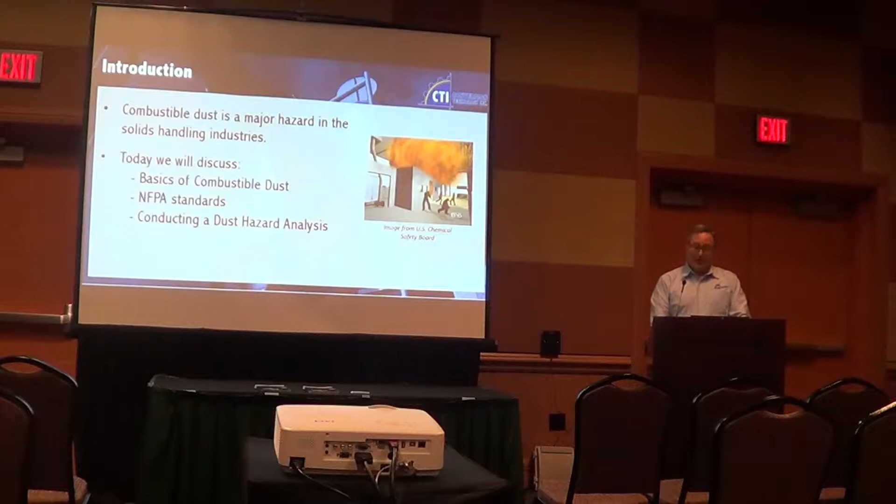So what do we mean when we talk about combustible dust? NFPA says that combustible dust is a particulate solid that presents a fire hazard when suspended in air, regardless of size or shape. In layman's terms, if it can burn and hangs in the air, if you can grab a clump of material, throw it in the air, and it'll waft around and form a cloud, and that's something that can burn, then that's a combustible dust.

Typically these would be dry foods, plastics, wood, rubber, textiles, basically most organic materials, but then also some non-organic materials like metals, if it's a fine enough powder. Basically anything that can oxidize, so if you get aluminum powder, it can oxidize and it can burn.

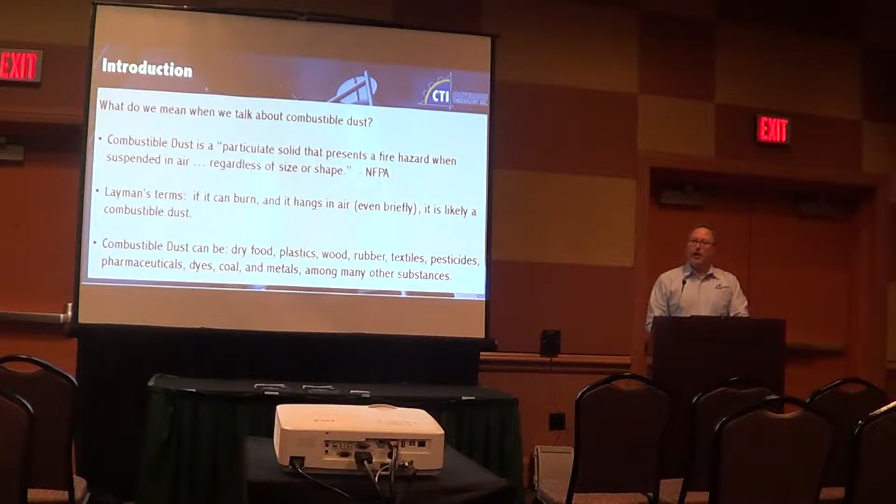With combustible dust, it's important to know that a decrease in particle size increases the rate of combustion. My example here: think about if you have an entire log, a whole tree. If you set that on fire, it would burn for hours and hours. But if you chop that up into smaller pieces, it burns a lot faster. And finally, if you get something like sawdust, it can burn very fast, especially if you mix it with air.

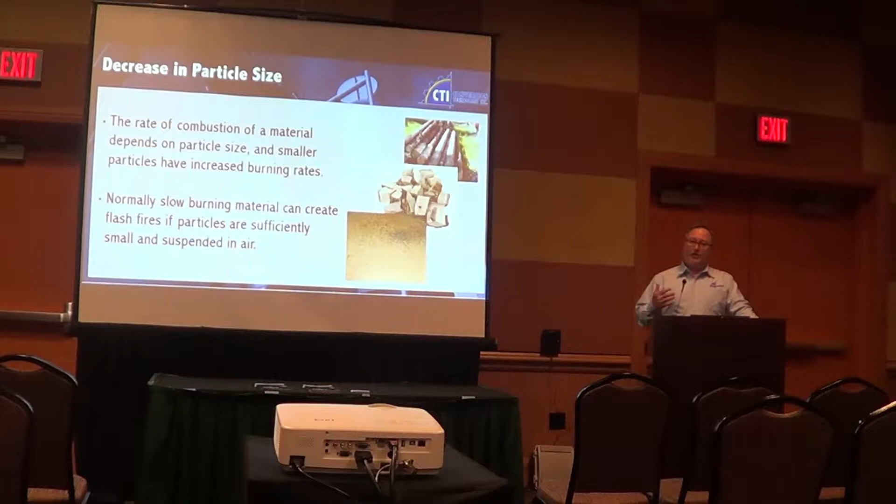And the reason for that goes back to the fire triangle. You have three components: fuel, oxygen, and ignition source or heat. That oxygen is a critical component of why things burn slower when they're larger, because that fuel in the log, most of it is inside the log. It's not touching oxygen, so you have to burn from the outside in, burning away the outer layers before the inner layers are touching oxygen.

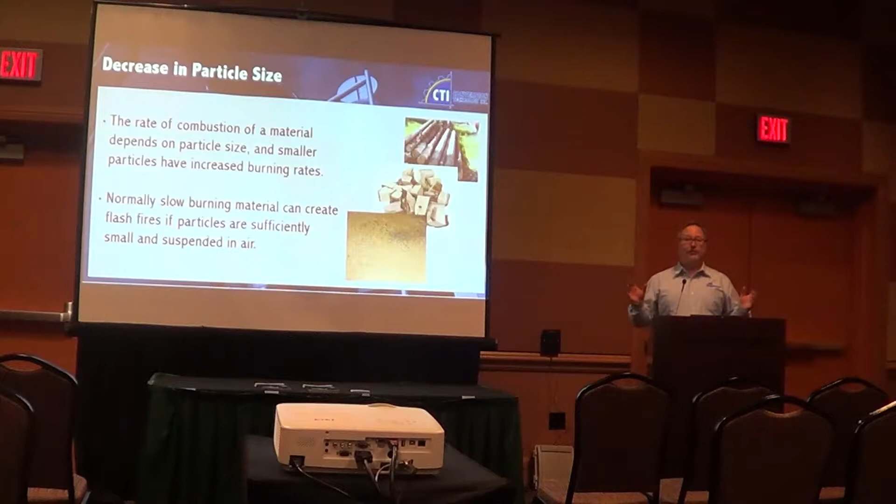But if you have sawdust and you disperse that in a dust cloud, all of the fuel is ready to burn right now, and it will burn right now. It'll be a flash fire, and it will just go.

So what are we talking about when we normally talk about combustible dust? What size are we talking about? Historically, we talk about something that's 420 microns, which is normally a US number 40 sieve. But really what you want to consider is if a particle can be suspended into the air, it doesn't matter if it's 420 microns or not. That particle isn't conscious -- it doesn't know, 'oh, I'm greater than 420 microns, I'm not combustible dust.'

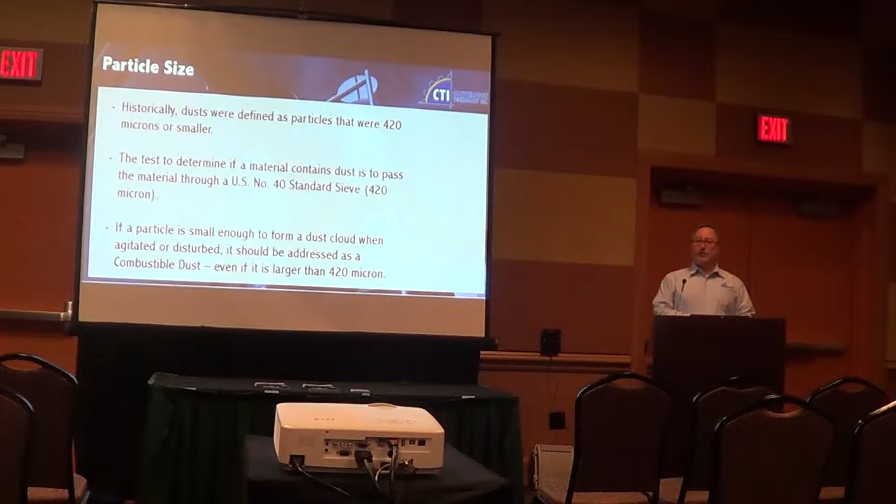There's actually been tests of sawdust and salt materials where you can have over a millimeter average particle size and it still acts like combustible dust. But this is what it typically looks like -- something like coarse table salt or granulated sugar is normally about the size of particles you're worried about as far as combustible dust. But again, the easiest way is to just grab the material, throw it in the air, and then you'll know maybe it's combustible dust.

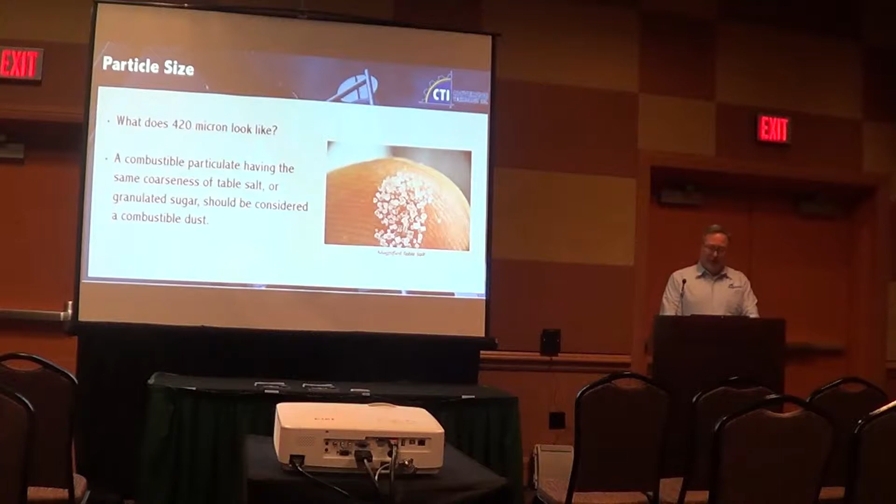So as we talk about the hazards of combustible dust, there are a few definitions I want to get out, because I'm going to talk about fires, deflagrations, and explosions. I just want to make sure we're all on the same page. So fire is the rapid oxidation of a material, and it's a chemical process.

That's one thing to remember: we think about fire as something we cook food with or warm ourselves with, but really fire in and of itself is just a chemical reaction.

So what happens is you have oxygen mixing with something that can oxidize, and it starts as a runaway reaction that goes so fast that it just produces a lot of heat.

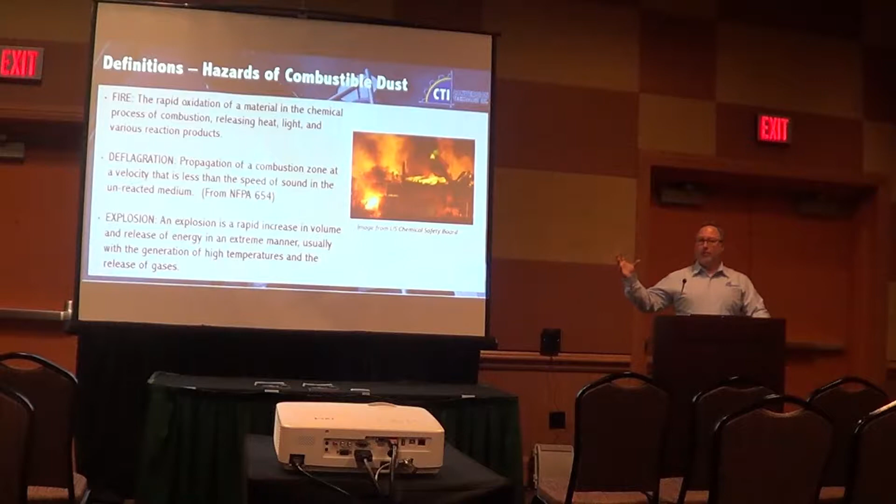A deflagration is where you have a flame front that propagates through a combustion zone. Basically part of a material or part of the dust cloud ignites, and that fire that starts on one side produces the heat that burns the rest of the material. But just think about it, it's just a flash fire, so it moves through material.

So a deflagration is different than something else you might know of as a detonation. The difference is in a detonation, the flame front or the pressure wave moves faster than the speed of sound. A deflagration is going to be less than that. So it's not like gunpowder, it's not like munitions, but it still is a rapid flash fire.

So an explosion in our context is basically going to be the increase of volume of an enclosure, and then the catastrophic failure that releases a lot of pent-up energy, releasing shrapnel, things like that. So when we talk about explosion, we're not talking about an explosion like a bomb, which has that supersonic blast wave going out. What we're talking about is a vessel or structure or building that has an increase in pressure inside because of the deflagration, and then the vessel itself ruptures and causes the explosion.

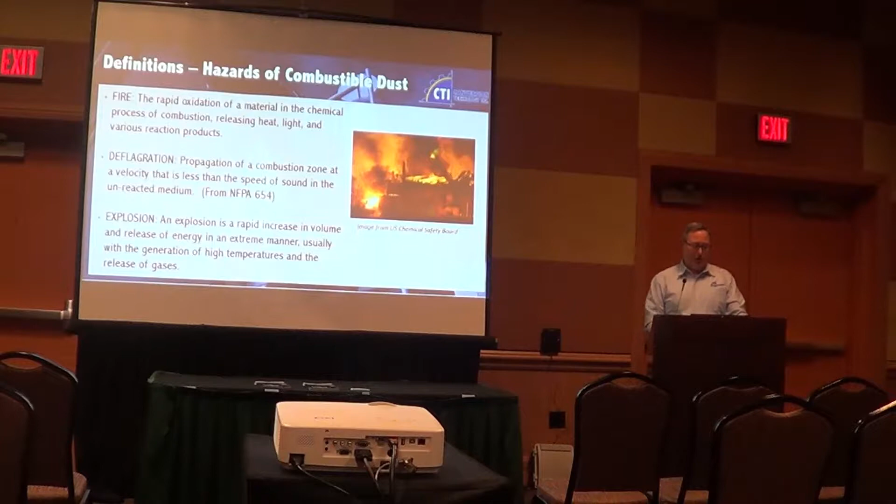So again, I mentioned the fire triangle. You have those three components: the oxygen, the heat, and the fuel. When we get to deflagrations, you just add one component to the fire triangle, so sometimes you'll hear it called the deflagration square. Basically you have the three things you need for a fire: the fuel, the oxygen, and the energy, the heat source. Then the fourth component you need is that fuel suspended in the air.

Oftentimes people say, oh, I'll take a blowtorch to my material and it doesn't burn, it just smolders, it doesn't do anything if they put it on a pile. The reason is some materials, if you normally try to burn them, might not burn that easily, because they really need a lot of oxygen. So if it's just sitting there on a pile, on the floor of your factory, or on a ledge somewhere, it might not burn that easily.

But if you get it suspended in the dust cloud, you get that fourth component, that suspension in the air, then you can have a deflagration of something that maybe normally doesn't burn too easily. But if you get it really mixed up with oxygen, a really rich environment where it's just ready, then it can burn.

Typically, having all four of those conditions in an industrial plant is sort of rare. If you were to walk into a room and it was at a thick enough concentration that you had a dust deflagration, you wouldn't want to be in the room. I mean, you probably would not be able to see across the room.

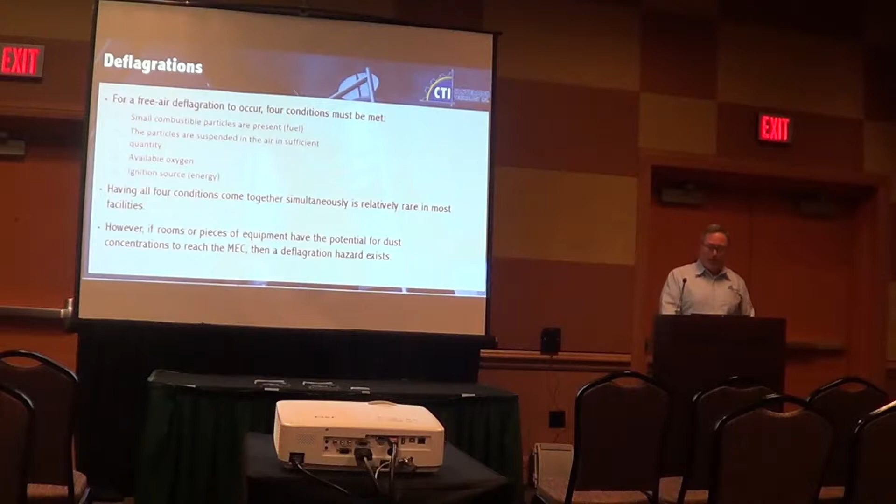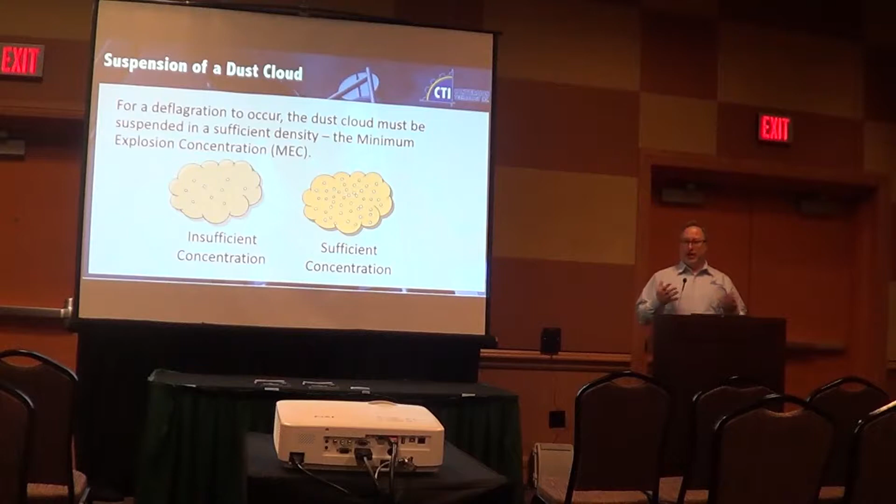The main reason is it has to be a sufficient concentration. Unlike industrial hygiene, where just a particle here or there breathed into your lungs can hurt you, with combustible dust those particles have to be close enough together that when one catches fire with just a little flame, it's close enough to ignite the next particle, and that one ignites the next. It has to be a thick enough cloud for that flame to propagate through, because the flame from one individual speck of dust isn't that big. You need a lot of specks of dust to get that flash fire.

One way to think about it: with coal dust, if it were at the minimum explosible concentration, you wouldn't be able to see a 25-watt light bulb 2 meters away, about 6 feet away. It would be that thick that you couldn't see that far. Hopefully most people don't work in environments like that.

When deflagrations occur, they release energy in the form of heat very rapidly. A fire generates a lot of heat, and that heat does two things. First, it heats up the air, and like a hot air balloon, when you heat up the air it expands. Second, that solid material, the dust, when you burn it, turns into gas, and gas is about 8 times the volume of the solid material.

If you have a little speck of sawdust and you burn it, the gas takes up 8 times more space. So you get a rapid increase in air temperature in that area, and the space that material takes up increases very rapidly and expands. You'll get a pressure wave that goes through, as that air and those gases expand, creating a pressure wave.

That pressure wave comes in front of the fire, and it will actually lift up dust that's sitting on surfaces. So if you don't have a good housekeeping program and you get a localized flash fire, that pressure wave moves forward, basically shoveling up the dust on the ground. Then that dust that gets shoveled up catches fire, and that's when you'll have these catastrophic events where the fire just rips through a building.

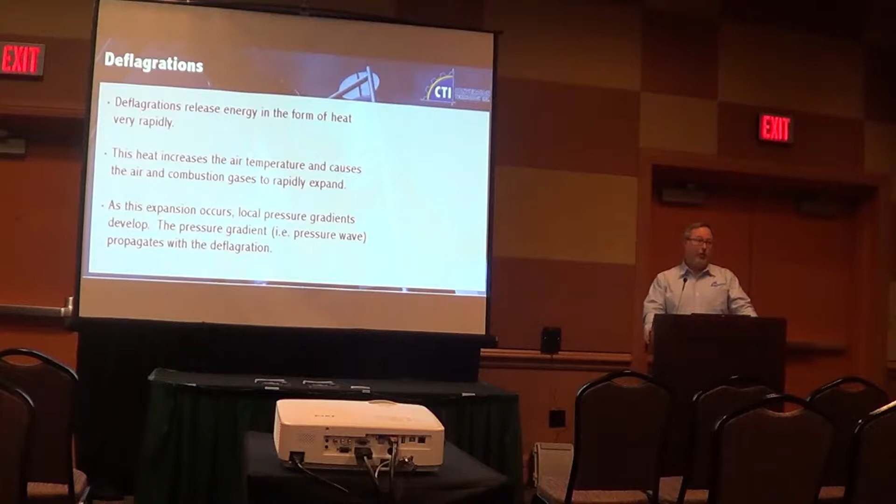Eventually that pressure wave expands to encompass the whole building or vessel where it occurs, and the building or vessel might not be able to contain that pressure. That's when you'll have dust explosions.

So the dust explosion hazard - if you want to look at your facility and ask where the hazards are, this is what you want to consider: if you have the potential for a dust cloud and ignition, and there's oxygen, and if that's enclosed by a building, a room, or some type of container, then you have the potential for an explosion, because the pressure generated from the deflagration doesn't have anywhere to go. It starts building on the walls of the vessel, on the walls of the building, and eventually the strength of that vessel or building won't be able to hold that pressure in.

You can get very large pressure buildup during a deflagration. When that structure ruptures, that's when you have an explosion - a catastrophic release of the pressure built up inside the vessel.

Most dust explosions originate inside pieces of equipment, as mentioned before, so you'll often have it start inside equipment or a container. In industrial operations, the most common places are dust collectors, which account for 50% of combustible dust incidents. Most of those are fires, because with a dust collector you're pulling the fuel into a filter, and except for when it's doing a filter pulse, the fuel is not actually suspended in the air - most of the time it's stuck on the filter.

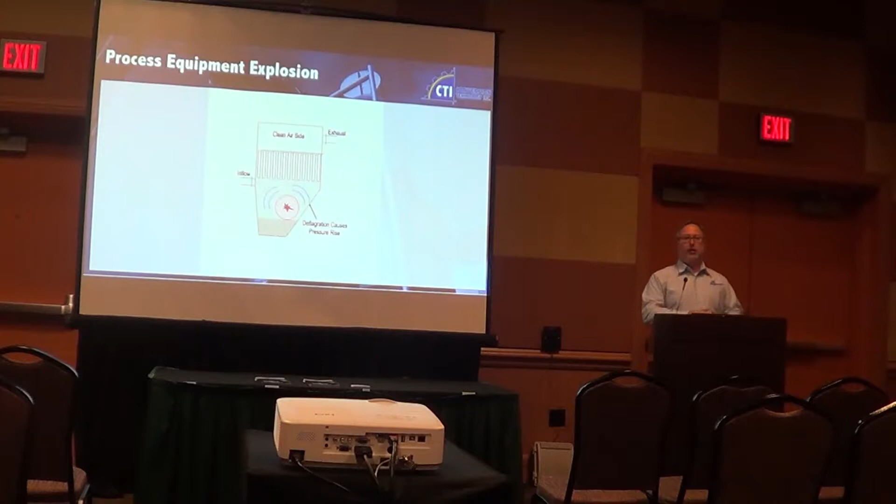Another way, I'll just briefly go into it, is explosion suppression. These systems have a detector that senses the pressure wave going into the vessel, and a cannon that within 5 to 20 milliseconds detects the pressure wave and releases to extinguish it. It floods the vessel with sodium bicarbonate, which stops that chemical reaction, stopping the flame and fire before it builds up so much pressure that it ruptures. But I could go into explosion protection techniques for hours, and we don't have that much time today.

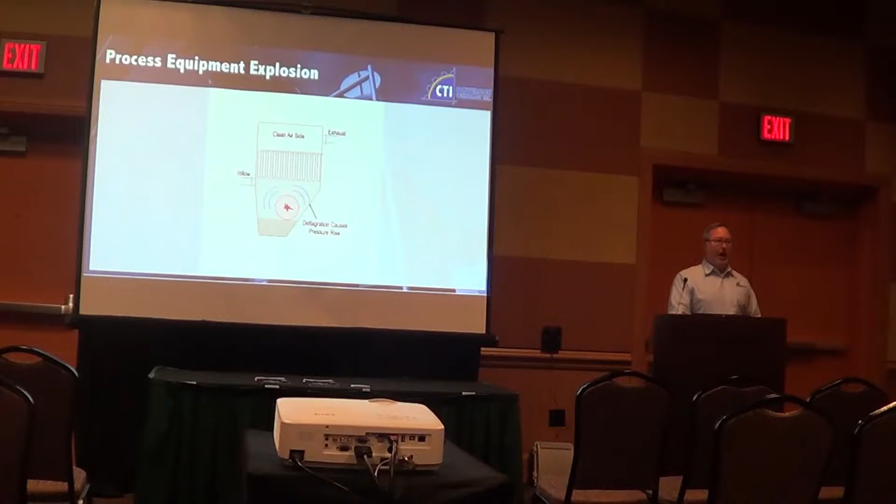In an industrial setting, dust explosions can create a chain reaction, resulting in more explosions and flash fires. Flame fronts can travel through ductwork from one piece of equipment to another. Inside the building, the pressure waves from the initial explosion can disturb settled dust in the air, creating a dust cloud that permeates throughout the whole building.

With past explosions or catastrophic accidents at facilities, the narrative is often that you hear something like fireworks going off, a pop, pop, pop. That's the flame front going through connected pieces of equipment, blowing up other places. It travels through ductwork, hits another vessel, another dust cloud explodes. And when it gets outside the equipment, if it creates a dust cloud in the room, that's when you can have an extremely bad secondary explosion, which we'll talk about in a second.

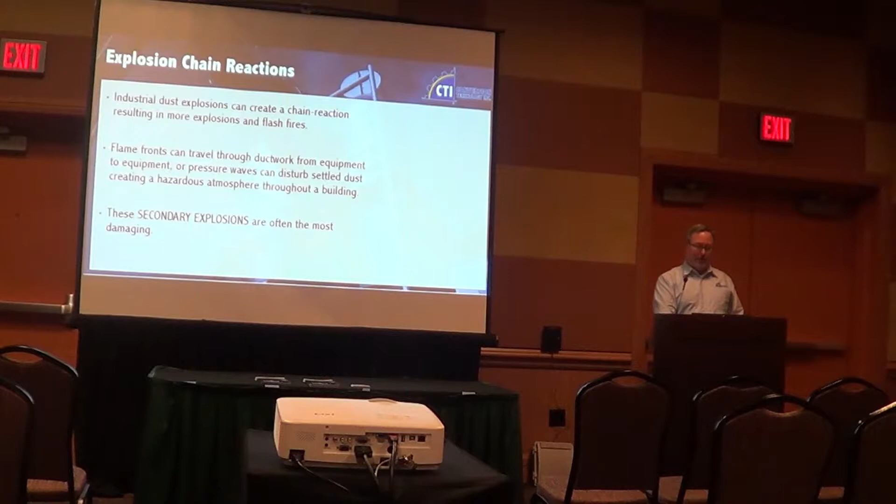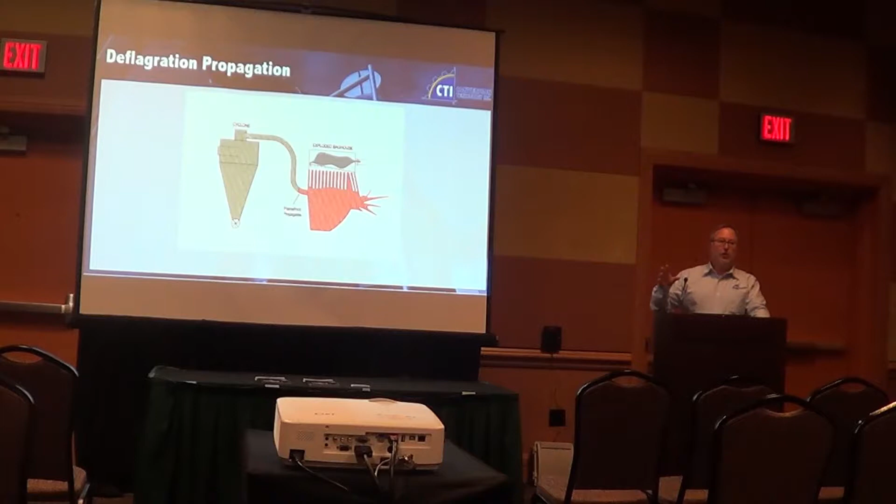So in the scenario where you have the baghouse explode, that flame front can travel against the flow of air. The air is flowing from the cyclone to the baghouse, but the flame front can travel faster than your conveying air, going back and causing another explosion in connected pieces of equipment.

A lot of times what we'll have here is isolation in the ductwork, some type of sensor. If you have a blast panel in the baghouse, it will have a detector that senses there was an explosion in the baghouse, and a fast-acting valve, or some active system, will shut off that connection in the ductwork. Or you might have a backblast damper, a passive system with a flapper. As I said before, the pressure wave goes in front of the flame, so it comes before the flame and slams the valve shut. Then when the flame comes, it hits the valve and doesn't travel back to other pieces of equipment.

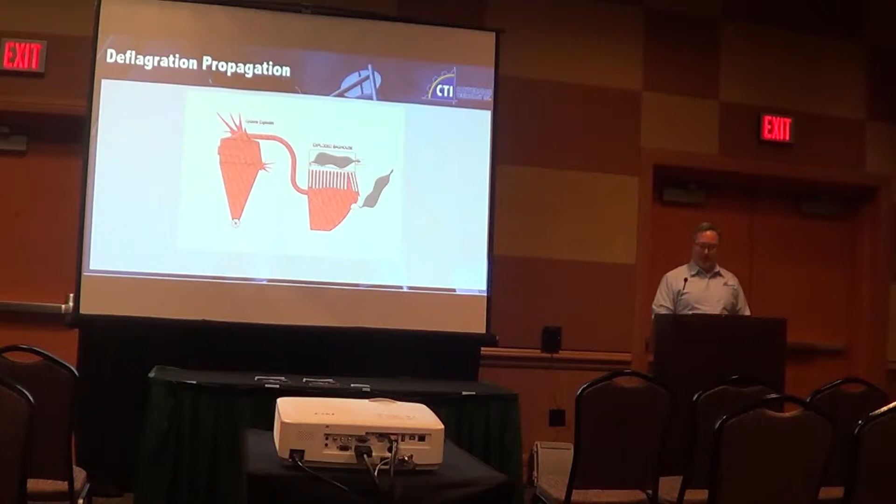But by far, the greatest hazard of combustible dust comes from secondary explosions. This is an image that OSHA had in their National Emphasis Program to illustrate what that is: a primary explosion occurs in a vessel inside a building.

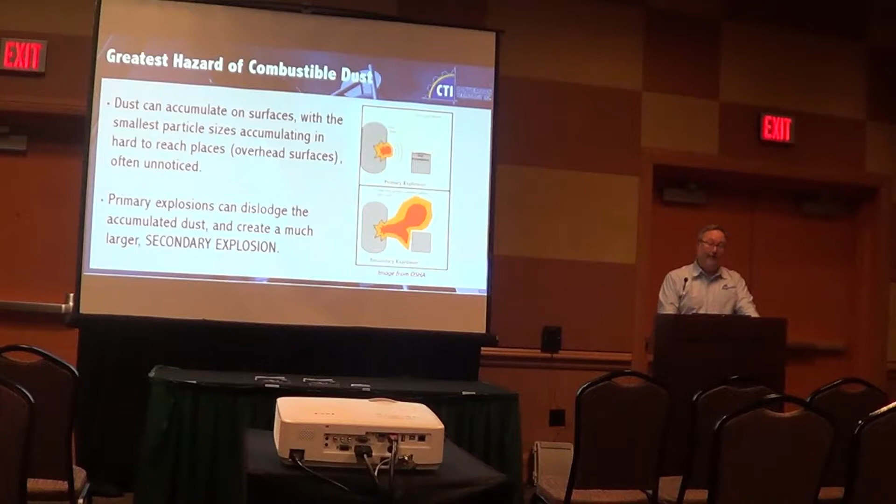If you have dust accumulation on surfaces, even overhead surfaces, you might do a great job of housekeeping on the floor or levels you can reach, but unbeknownst to you the rafters or purlins 20 feet up are covered in dust. If a primary explosion creates a shock or pressure wave through the facility, it can knock the dust off surfaces, lift it off the ground, and clean off control rooms that haven't been cleaned in 5 years. That dust swept off the surfaces becomes a larger dust cloud in your building, and then a flame or other ignition source can cause a secondary explosion.

And this is where you have really catastrophic accidents. This event is what got OSHA started when they reissued the National Emphasis Program 11 years ago—the Imperial Sugar incident near Savannah, Georgia, and Port Wentworth.

14 people were killed, 36 were injured. It was such a massive event that it took the U.S. Chemical Safety Board and OSHA 19 months to investigate it.

They ultimately determined it was inadequate design — they enclosed a conveyor that didn't provide any way of extracting the dust, which allowed a dust cloud to form inside the conveyor. It was also poorly maintained; the bearings weren't maintained, and that created an ignition source.

And the reason it was so devastating is poor housekeeping. There were snowdrifts, apparently, of sugar in that facility, and when this happened inside the piece of equipment, it got outside and started hitting those accumulated piles of sugar — this is what happened.

A more recent incident happened a couple of years ago at a Didion facility in Cambria, Wisconsin — a flour mill or corn mill. There were 19 employees on site; 5 of them were killed and the other 14 were injured. So 100% of the people on site were severely impacted by this event.

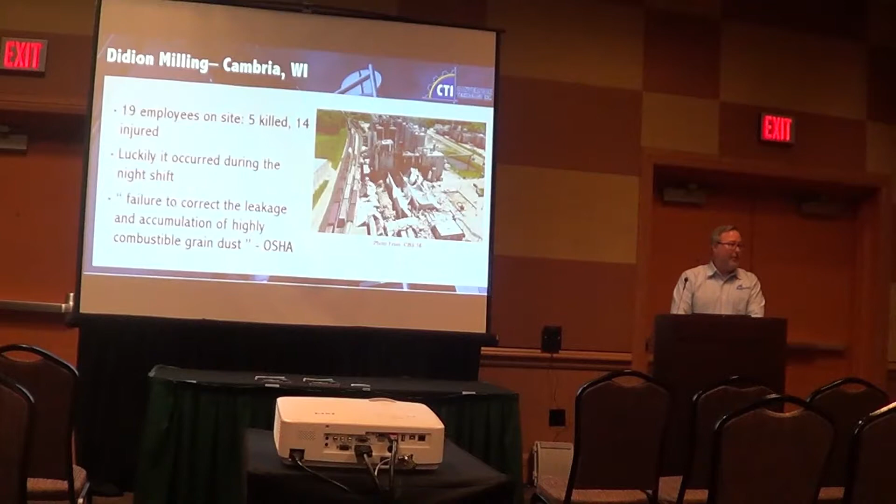All right, so we'll talk a little bit about NFPA standards and how you can use those to help ensure the safety of your facility. There are several standards that exist to prevent dust fires and explosions. Currently there are several, but ultimately it might go to a single standard, which I'll mention soon.

The National Fire Protection Association has staff, but it's also a volunteer organization. Members like myself and others have our normal employers, and we volunteer and sit on committees. It's a diverse group — people from industries, consultants, equipment manufacturers, firemen and fire marshals, and insurance representatives. It's a group of people familiar with industry from different angles who come together to write these standards.

Several of the standards were recently updated. NFPA 652, the fundamentals of combustible dust, was updated to the 2019 edition. But with NFPA standards, they're kind of like cars — the 2019 edition came out in 2018, and the 2020 editions are going to come out in 2019. So most of the other standards are coming out this year, even though they'll be the 2020 editions.

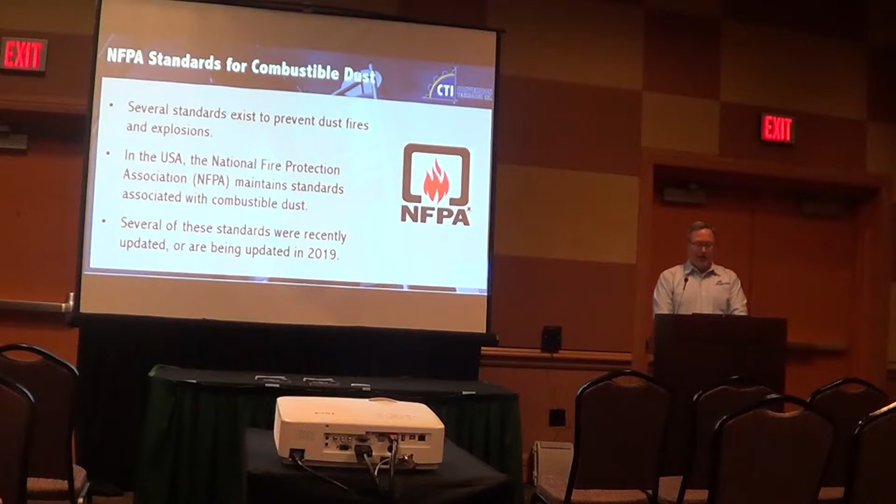NFPA is charged with creating fire standards for fire prevention and fire protection. NFPA doesn't have any enforcement power of its own, so you don't have to worry about the NFPA police banging on your door. It's a volunteer organization, but since they don't have enforcement power of their own, they rely on authorities having jurisdiction to enforce their standards.

Authorities having jurisdiction are typically your local fire marshal or the people who issue building permits. So if you need a building permit or a business license, they might say, okay, if you're going to have a building or business here, you have to design that structure to be in compliance with NFPA standards. That's typically who authorities having jurisdiction are.

But it can also be your insurance provider. They say, hey, we're assuming the risk of your operation, so we're going to insure you only if you design your building in accordance with these fire protection standards — because if you don't design according to NFPA, then it's too risky for us to insure you.

But then also OSHA relies on NFPA standards as a way to show that this is a recognized hazard. For example, in woodworking, NFPA standards have been around since the 1920s — almost 100 years of documents stating that sawdust is a fire hazard. If you don't deal with it, you're ignoring a recognized hazard.

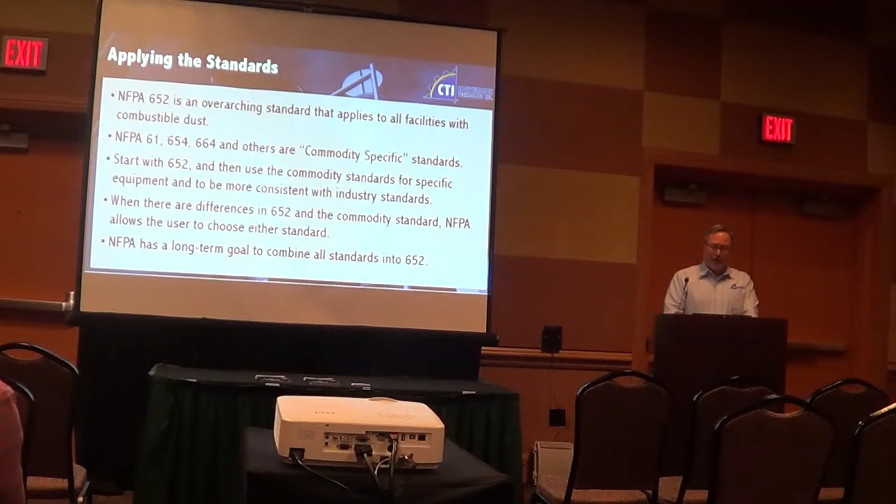So what are the major requirements of NFPA? What does it make you do, or what does it say you should do?

First, it talks about how you lay out and design a facility where you're going to have combustible dust. It talks about separating dust hazards from other hazards.

One of the things about the Didion flour mill, that mill was the whole area where there was nothing left. In that picture, there was just basically a white concrete pad. That was their warehouse area. So there was dust that was going from the processing into their warehouse, and that's why it just completely leveled that, because they weren't properly separating where you're generating combustible dust from places where you normally wouldn't have combustible dust.

So dust is going to waft through the air. It's going to deposit in places. So NFPA talks about how do you separate those areas in your building.

All the standards require you to learn about the properties of the material. How easy is it to ignite the dust in your process? Is this dust non-combustible, and this dust is combustible?

If you have a cement plant, you might have some starch, and you might have some rock, other material. Well, the rock dust probably isn't combustible, but the starch might be combustible. So you need to know which materials are combustible, which aren't.

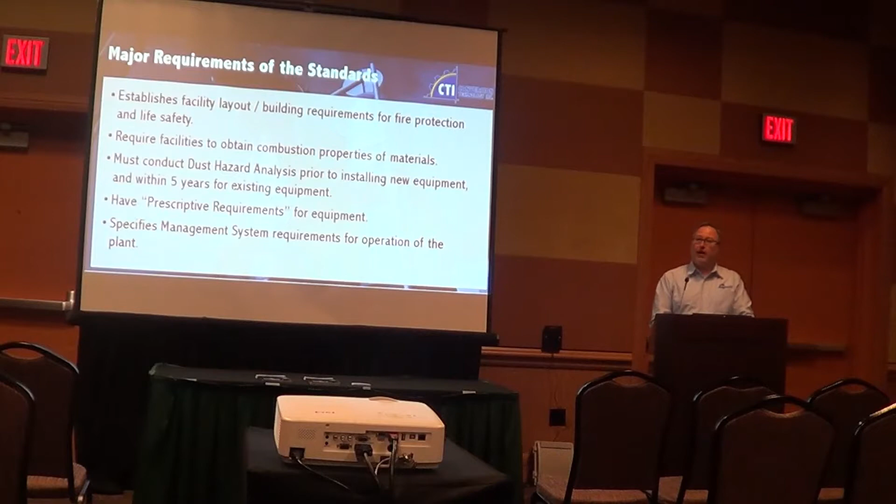There were several explosions just in a few-month period. And WorkSafe British Columbia, which is their equivalent of OSHA, put a moratorium on sawmilling of dry, beetle-killed lumber until they could address the hazard, figure out how can they do this safely.

So these management systems are talked about in NFPA, this management of change, the hazard evaluation. All this is talked about, how you have to have that system in place. It talks about housekeeping protocols, employee training. All this stuff is addressed in NFPA.

Yes, those management systems are in 652.

It talks about management of change, and those requirements are slowly rolling out to the other standards. There was an MOC requirement in NFPA 61, and the next version is going to be more stringent.

They were kind of lax before. The NFPA 61 committee is interesting—the different committees have different personalities, and some people take hazards a little more seriously while others think, no, just keep going. But they're starting to really come together and coalesce on what the requirements are.

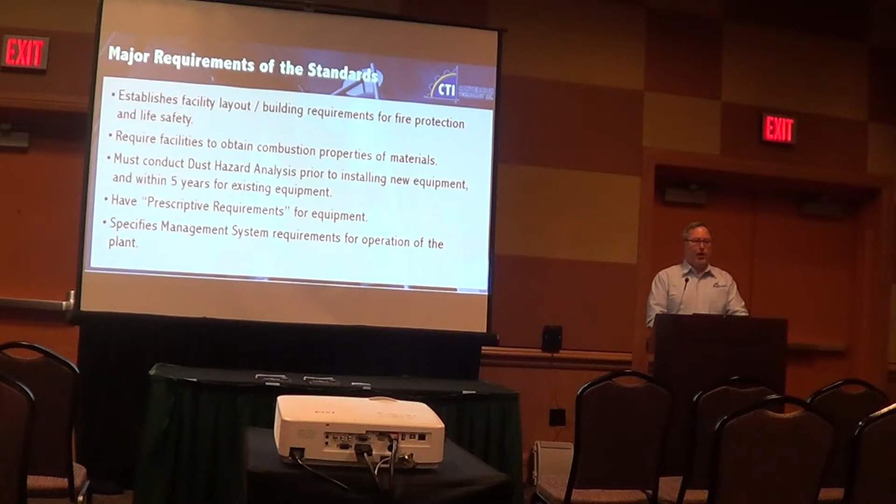So there have been some recent changes. If you're someone who's pretty knowledgeable about NFPA standards, with NFPA 652 there previously was a deadline to complete dust hazard analysis for existing processes—3 years after the date of initial issuance of NFPA 652. That would have been September of last year.

So last year they issued an extension. All the other standards gave people 5 years, so they just went around that. Now the deadline to complete a dust hazard analysis, or DHA, for existing processes is September of next year.

They've also added a requirement that you can't just do an initial DHA and walk away—you have to revalidate it every 5 years. It's basically like the PSM requirement: if you do a process hazard analysis, you've got to revalidate it, come back and review it, because there will be changes in the standards and minor changes in your equipment, and just continual improvement.

We're always learning, so you want to come back, because some of the assumptions you made in your dust hazard analysis might not be valid. You might say, oh, we'll never have a fire here. Well, 5 years later you come back and realize you actually had a fire every 6 months, so maybe your assumptions are wrong.

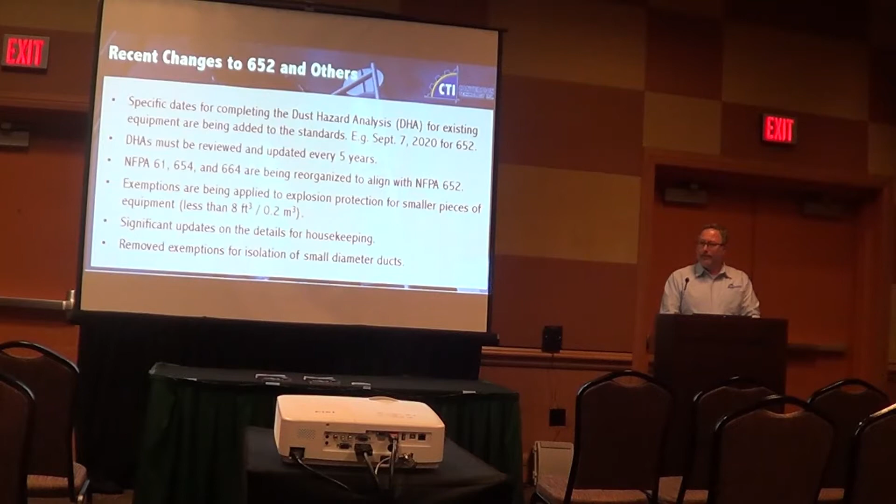Yes? These details on housekeeping—are they currently available or shortly forthcoming? If you get the current version of NFPA 652, yeah, they're going to be in there.

And if you get the standard, there's a little marker next to the code—it'll have a little N. So for example chapter 8.3.4, if it has an N next to it, that means it's new. You can go to the housekeeping section, look for things with a little N next to them, and you'll see how much new data is in there.

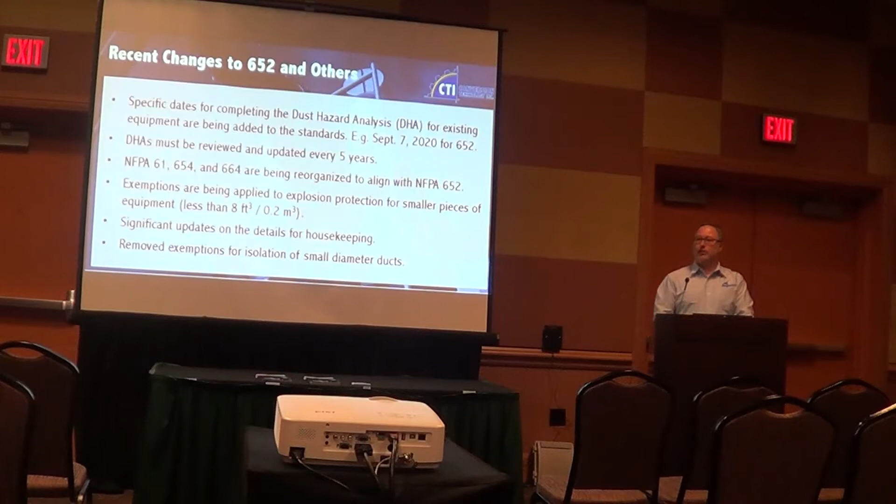All right, so now we're going to conclude. I'll talk about how to assess the hazards. So in your facility, how do you do a dust hazard analysis? How do you identify the hazards in your process?

The potential for dust fire is going to vary from facility to facility and process. Even if you're handling the same material, the details of your specific site and equipment are going to be different than your neighbors. So in order to determine where you have deflagration hazards, fire hazards, or explosion hazards, you do a dust hazard analysis.

NFPA 652 has specific requirements for DHAs. As I mentioned before, DHAs must be completed for existing processes by September 7th of 2020. But there are already news reports I've seen showing evidence that OSHA is asking people not to wait on the deadline. We've already seen citations issued for non-VPP sites for not having a DHA. Even though the deadline hasn't come, OSHA still says it's a good process and you need to identify the hazards.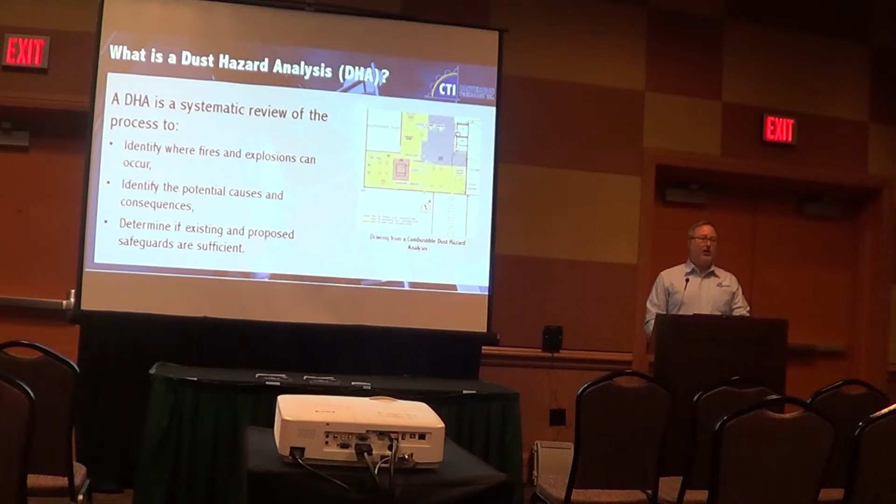So what is a DHA? It's a systematic review of the process to identify where fires and explosions can occur, identify the causes of those events and the consequences, and ultimately determine if the existing or proposed safeguards are adequate to keep the risk at your facility at an acceptable level.

So what are the steps? I'll go through these in detail. One, you want to evaluate the material being handled. Create a list of the processes that are handling those particulates. Then with that list of equipment, you identify where there's fire, deflagration, or explosion hazards. Then look for potential ignition sources.

Discuss the fire and explosion scenarios—talk about the consequences of these fires or explosions. Review the safeguards that are in place to mitigate the hazards. Evaluate the level of risk to determine if those safeguards are adequate.

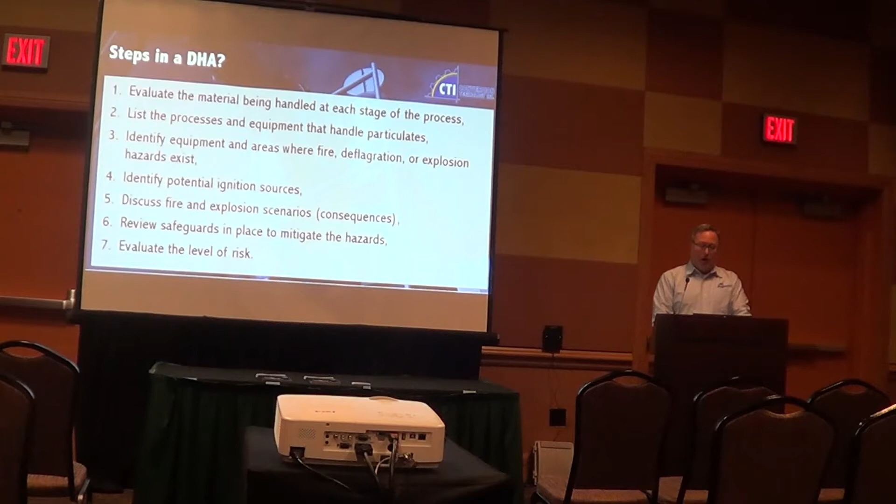So first, evaluate material and process. You want to identify all the potential dust that is either handled—say, powders as raw material—or generated, such as from grinding or sawing operations. You want to identify all the different dust at your facility.

First step, if it's a powder or something easy, you might be able to look at the safety data sheet. When we switched to the GHS standards, those standards specifically require that the manufacturer identify combustible dust hazards, so hopefully it's on the safety data sheet. A lot of times you'll see a blanket statement like, 'this material can be a combustible dust when suspended in air.' But if you see that, at least you know that if you're generating dust from this material, it's possibly combustible dust.

As you know, not all vendors and material manufacturers are doing that with their safety data sheets. Sometimes they might have missed that, or they might not identify it. Or if you have something that you're handling, like food, not all food has to have safety data sheets.

You can also look at textbooks and online databases. NFPA 652 has an appendix with a lot of material information on whether something is combustible dust. But ultimately, especially if you're designing explosion protection, you need to know the specific properties of your dust, because those values in the textbook might be different, and those explosion properties are very important for explosion protection design.

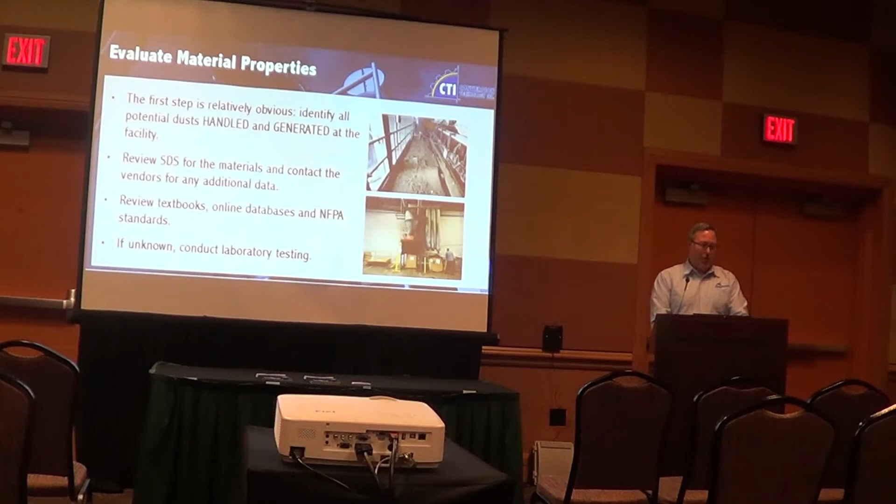So if you are doing that, you want to conduct laboratory testing to get the specific properties of your material. Or sometimes if you just look into databases, look in NFPA, look at safety data sheets, and you just don't know, then you might want to at least do a screening analysis to say, is this combustible dust or not?

The next step, and one of the most important ways of making sure you efficiently do a dust hazard analysis and don't miss anything, is to come up with a really comprehensive list of equipment that handles combustible dust. This picture is from NFPA 652, from an example of how to do a DHA.

The types of equipment you want to really pay special attention to when writing your list down: pay attention to bins, tanks, and silos, those places that store particulate material, and when you're loading in you can have that dust cloud. Look at hammer mills, pulverizers, grinders, particle size reduction equipment - those are all potential ignition sources. So your hazards downstream of those pieces of equipment are going to be greater than where you don't have that in line. Same thing with dryers and ovens.

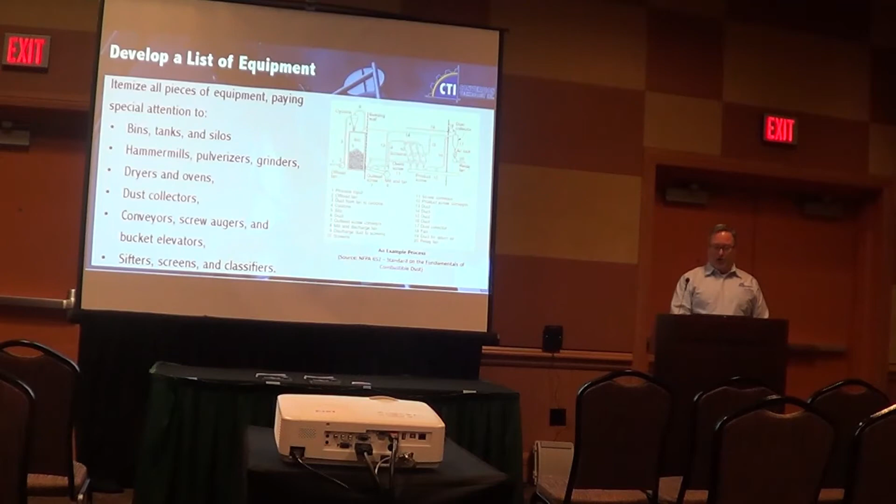Those are potential sources of embers in the process. Look at dust collectors, look at the conveyors, things that are handling particles, and also sifters, screens, classifiers. So basically, just come up with a list - like they show here, write down numbers for all the pieces of equipment that you want to include in the DHA.

And then also write down the areas of the building - identify the rooms where you can have combustible dust buildup. And then for each of those items on your list, you want to look at the material properties. What type of product is this handling? How easy is it to burn? And determine is there a dust cloud inside this vessel or not?

Is it an open belt conveyor, so I don't have to worry about there being confinement in there? Or is it an enclosed conveyor? How far from a transition point? Where are these dust clouds going to be located inside the piece of equipment?

And then for buildings, you want to identify areas where dust can accumulate. You'll do this by doing a walkthrough, looking where dust is located in the building. Periodically get a lift in there, lift up and check the rack, check the overhead surfaces, make sure there's not dust where you weren't expecting it.

Also consider what upset conditions could create a dust cloud in a room. I was doing a DHA at a bakery one time, and I would eat a piece of bread that fell on the floor there - it was just spotless, it was great. I said, your housekeeping is really amazing, your dust collection is good, is this how it always is? They said, yeah, it's always like this, except for those two times a year we'll blow a pneumatic conveying line, and then we just blow the flour into the whole room.

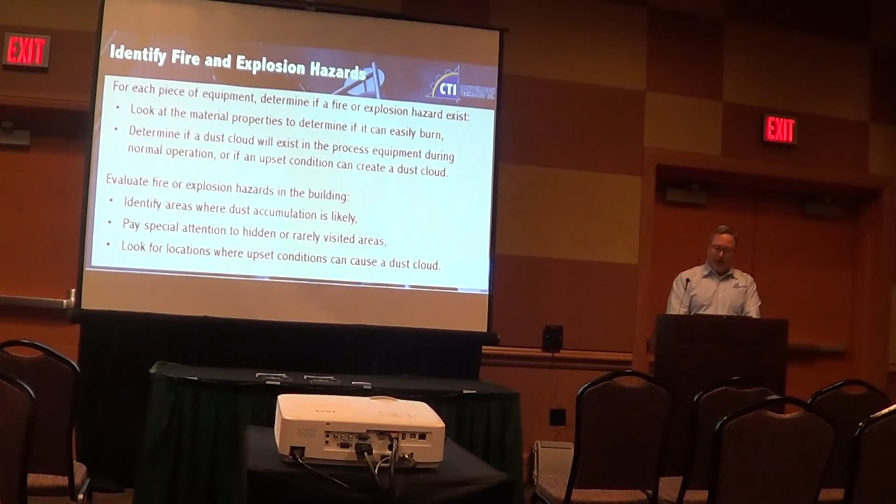So those are all the things you consider when you're looking at the building itself. Not only where is dust accumulating, but what could happen that could create a dust cloud. And then you look for credible ignition sources.

The things you want to look for: process heat. So you have dryers in a process, or any place where you're heating up the material, you can get self-ignition or create embers that go downstream.

A common source of ignition is friction, just bearings or moving parts inside pieces of equipment. With belt conveyors, if the belt gets out of alignment and starts rubbing on the side, you can generate frictional heat. A big issue is hot work.

I'm sure most people here have a pretty good hot work program. A lot of places I go to, when they think about hot work, they say, oh, remove combustible material - I'll move this gas cylinder, I'll move this cardboard box, I'll make sure there's no aerosol cans around where I'm doing hot work. But they forget to clean up the dust on the ground, they forget the dust on the wall. So if you have dust in the environment, make sure your hot work procedure includes washing down the area, because hot work can create explosions or be the ignition source.

We were at a wood pellet mill and they had two open conveyors outside. They were doing hot work on a completely different process line, but the flame from that hot work fell into the open conveyor for a different process. It started creating an ember, and that went to a silo, and they had a silo explosion from hot work on a different process - it was just close enough that the ember went in there.

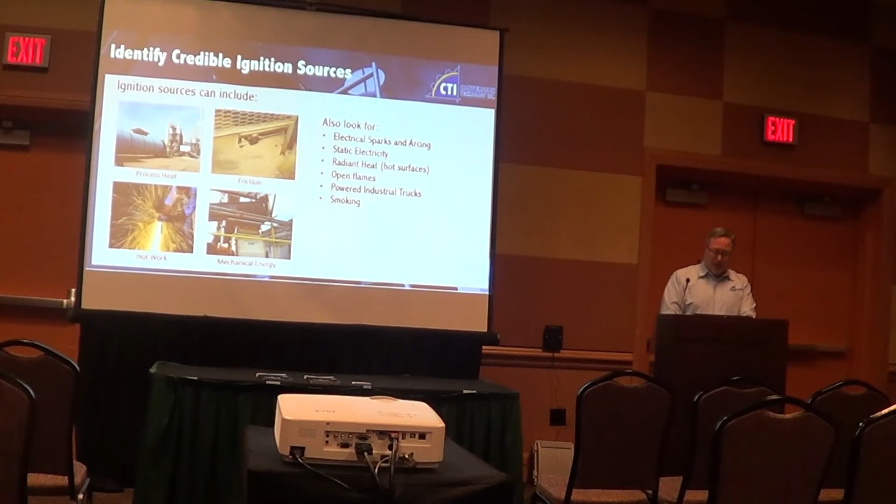Once you've looked at where dust clouds or accumulated dust exist in your building, in your process, in your factory, and where there are potential ignition sources, you ask: what can happen if there is a fire? Do we really only have a chance of a fire here, or can we have an explosion? So you talk through what will happen.

The things you want to consider: what engineering controls and safeguards are in place to mitigate the hazard, and what additional controls might be needed. What types of equipment and occupancies are located near where that dust explosion or dust fire hazard is.

What type of equipment is connected via ductwork? That way you can determine when a hazard will go from one place to another, and if there's an explosion in this piece of equipment, what all is impacted, and what's really the chain of events that can occur. As I mentioned earlier, it's like firecrackers going off. So you want to consider the consequences.

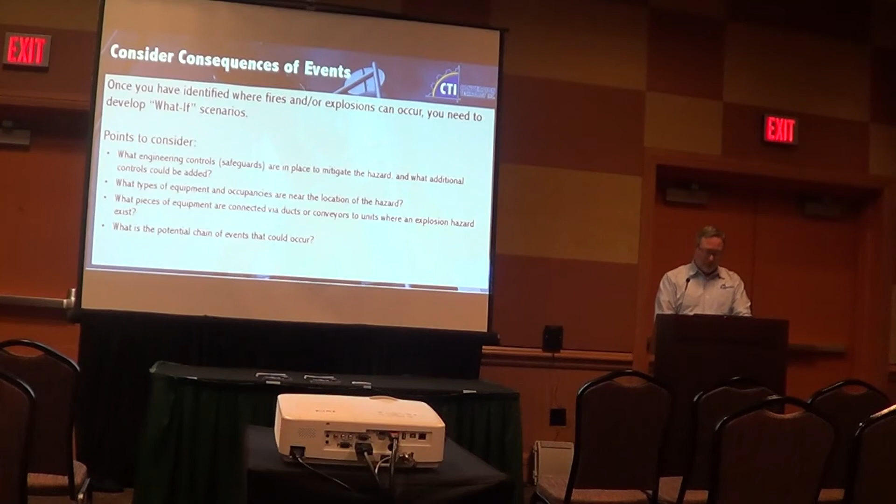And then once you've considered the consequences, you evaluate the risk. In life, you can't get rid of all the hazards, but what you can do is reduce the risk. Really, risk is a combination of the severity of an event and the likelihood of an event, and what do we find acceptable?

With likelihood, you want to consider what's the potential - how likely is it for there to be a dust cloud in this area or this piece of equipment? Is it a long conveyor where there's no material being added, so it's not likely to have a dust cloud, or is it a bin where there's always one during filling?

What's the likelihood of an ignition source? And then you want to consider all operating modes, because most of the time explosions don't happen when everything's going perfect.

So you want to consider, what happens when we're starting up the process? Is it different than when we're normally running it? What happens when we shut down? What are some of the expected failure scenarios that could create a process upset? And look at that too, as far as what's the likelihood of there being an event.

And then with severity, not all dust explosion hazards are the same. A baghouse that's elevated 40 foot up in the air on the back of the property where nobody ever goes, if that explodes, the severity is a lot less than a dust collector that's right next to the packaging line and on the employee walkway.

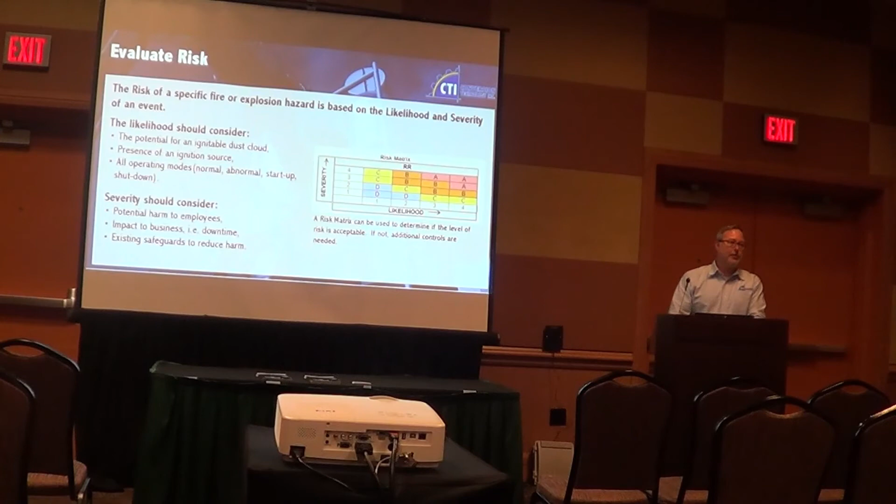This will help identify areas where the risk is unacceptable. So you might say, yeah, there's an explosion hazard here, but it's very minimal. And if we're going to spend money, we have a limited budget. I don't think anybody has an infinite budget to say, okay, I can spend $1 million to go after dust explosion hazards. You can't do that.

Most people have to say, we've identified these hazards, we have a 3-year plan or a 5-year plan. And that risk matrix is going to help you say, hey, look, we need to do these in the first 3 months, we can do these the next 3 months. And you come up with, you hit the highest risk up front, and then the lower risk, yeah, you want to address them, but apply that to next year's budget. And that's really how you want to go through and use that risk analysis.

So that's the end. Are there any questions that you have today?

Question. What I have found in VPP audits as well as in internal company audits is that there aren't a whole lot of experts who can come in and assess the dust hazards. And so they take a look at the NFPA requirements and read into that, okay, you have to test every dust in your facility. Even if it's dust on a table out in a warehouse, where you have forklifts coming in and out of a gravel yard, and I know that's not a combustible dust, but we still have to do the testing, and every one of those samples is $10,000.